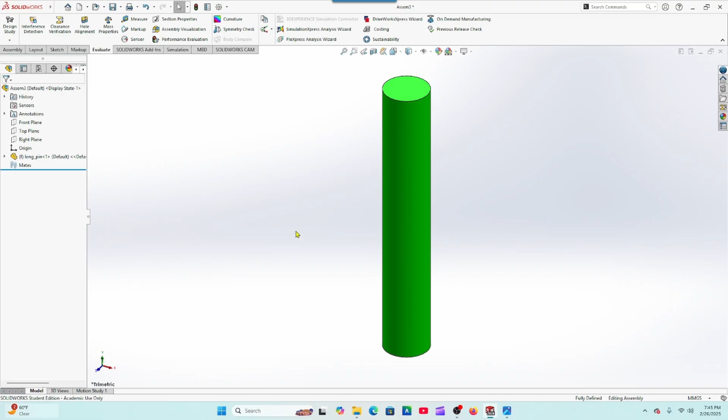So I'm going to bring the first one in and set it up just like so. I'm going to bring that in, then go over to assembly, and we need to insert some more components. So I can hit the drop down and do insert components, and it'll open up my dialog box again, and I can select the chain link. It's going to ask me this again. Now, it probably won't do that on your exam, but if it does, that's what you would select.

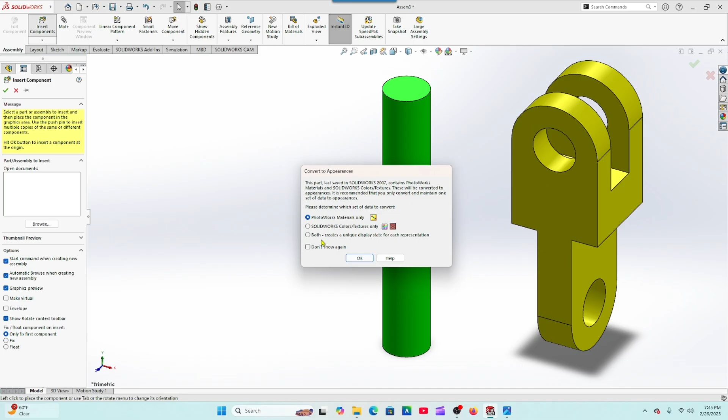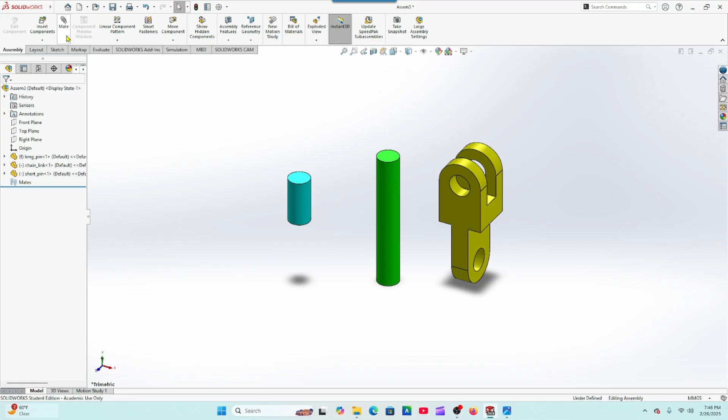Alright, so we've got that, and we have one more component that I'm going to bring in, which is the short pin. I'm going to say yes, and put that right here because that's fine the way it is. Now, you'll see that this chain link is not oriented the way I want it, and in this particular instance it really doesn't matter because this is fixed. Depending on what surfaces I pick over here when I go to assemble this to do mates, it will all come out the way it's supposed to. So I'm going to come over here to where it says mate, we're still in the assembly tab.

I'm going to go to mate. Then I'm going to click the inside of this hole right here, and you'll see it gives me that option. It lets me know I have the face of that part, that chain link. Then I'm going to select the face of this pin, and you see how it rotates it around and orients everything the way we want it as soon as I do that.

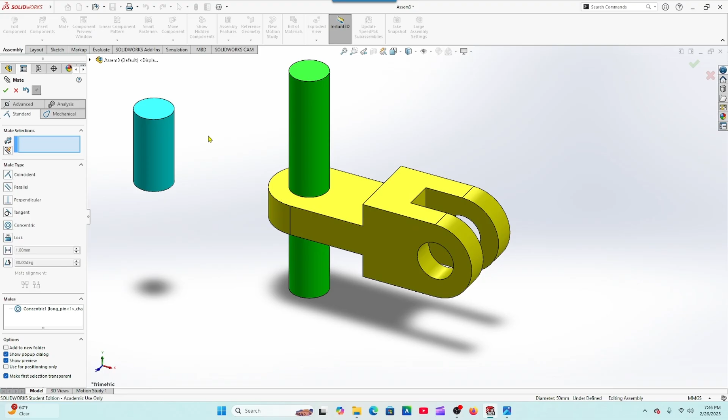So I'm going to hit my green check mark. I'm still in the mate tab, so I don't have to do anything different. Now I can select the top face of this pin or this link and the top face here. It's going to make it coincident, which is what we want, and I can hit my green check mark.

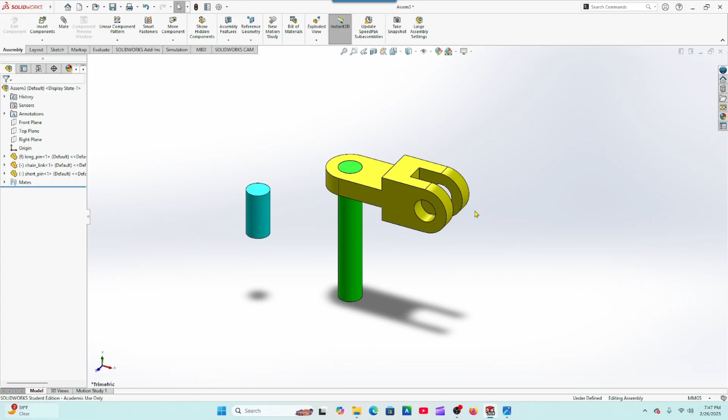Now I'm short parts, right? I still got to bring in some more links, so I'm going to exit out of mates for a second. I could have done this before I started, but I just wanted to demonstrate this to you. If you hold down control, you bring in one part, then hold down control and click on this part and drag away, it creates another part for you. So I'm going to do that a couple more times.

Until I have the links in here that I need. Then I'm going to do the same thing here. I'm going to click this, and it created another one of those, so I'll get rid of that one, I don't need it. And I'll do that right there. Then I'm going to hold control and click, and now I have everything that I need. Now I still need one more of these pins, so I can go ahead and do that while I'm in here.

And we're good to go now. We have all of the parts in here that we need. So now I'm going to go back into my mate dialog here, and I'm going to start putting everything together.

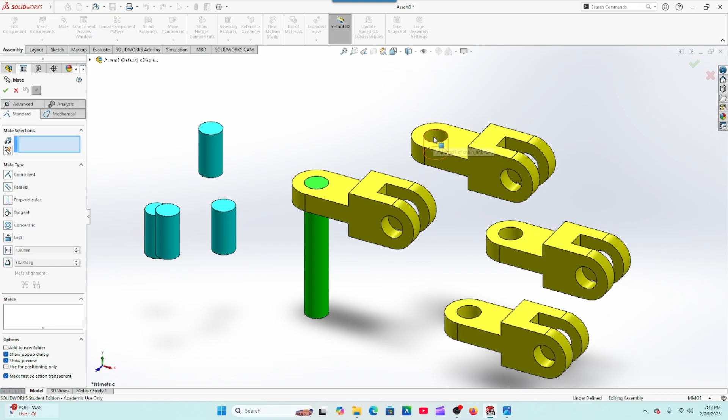So here I'm just going to pick the inside of this hole right here, and then I'm going to pick the face on this chain link, and you'll see that it rotates the other chain link around to fit in there. And then select this face, and this here is just a lot of rotating around.

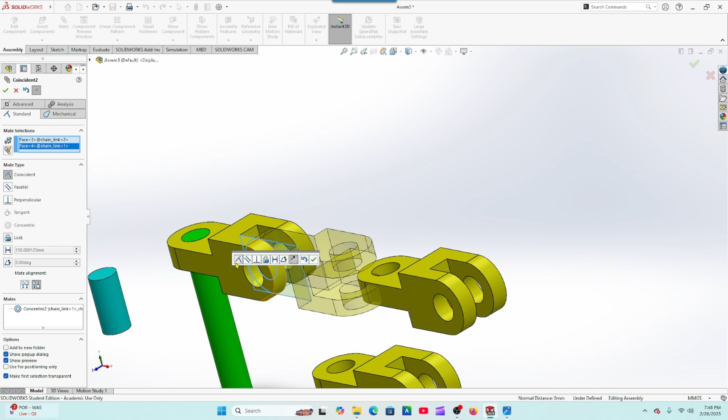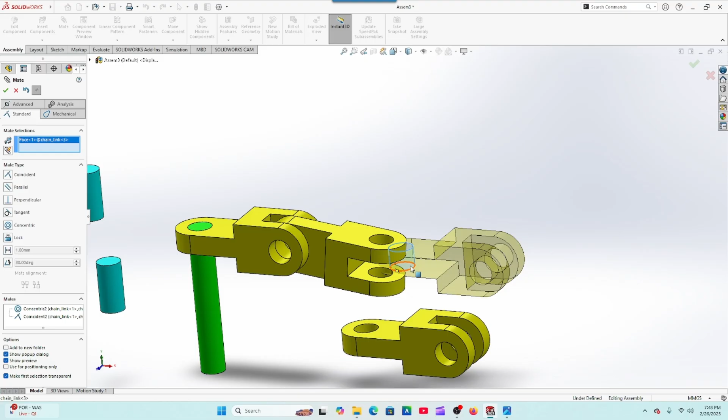Okay, so here I click the inside of that pin, that hole right there, and then I click that hole. It makes that concentric, those two holes concentric to each other. Now you'll see I can move this around and it doesn't affect anything. All it does is it keeps these holes concentric to each other.

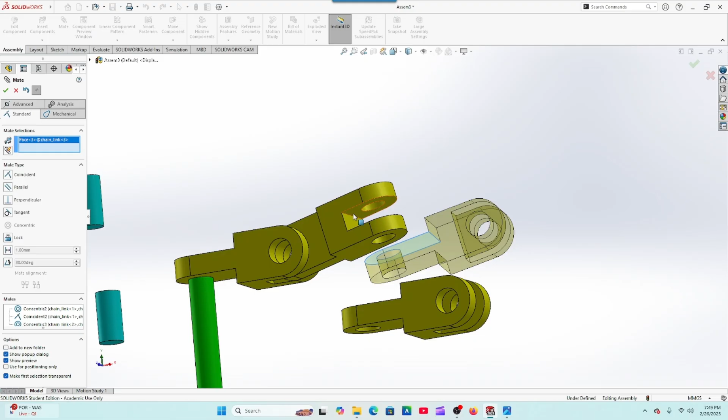But I needed to move it out so that I could select that face and then select this face. And it's coincident, so I can go ahead and hit my green check mark. I'm going to exit out or scroll out just a little bit. I'm going to rotate this around, and I'm going to put just a little bit of a bend in here, because remember, that has a bend to it, right?

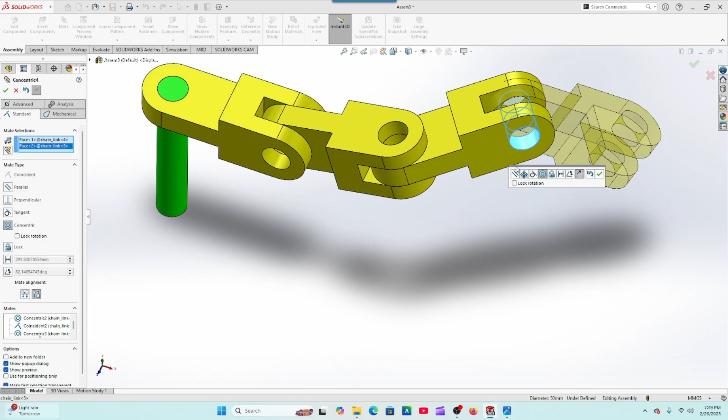Then I'm going to go ahead and scroll back in here. I'm going to pick that surface, the inside of that hole, and this one here, so it makes them concentric. And then I'm going to click this face and this face, make them coincident to each other, hit my green check mark.

And I'm going to rotate this one up, because if I remember correctly, that's the way that was facing. We'll verify it. It sure is. So we're good to go.

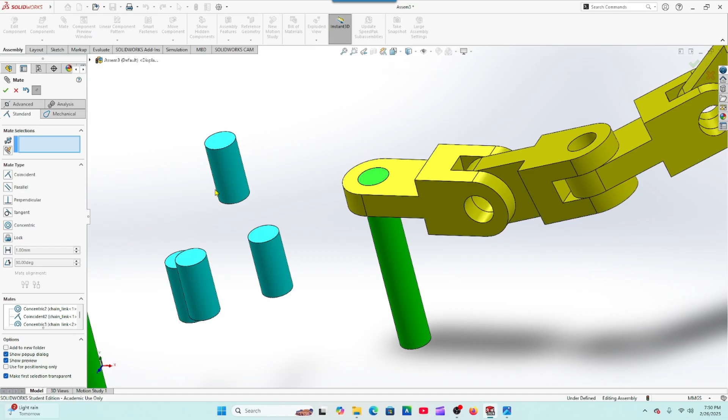All right, so now I'm just going to start putting my pins together. Click that, the face of that pin, and then the face of the inside hole there. It brings it concentric. And then I click the face of that pin and the face of this chain link. It makes it coincident, green check mark. And then I'm just going to rinse and repeat until I get everything done.

Green check mark here. Hit my green check mark. And then I'm going to do this one here.

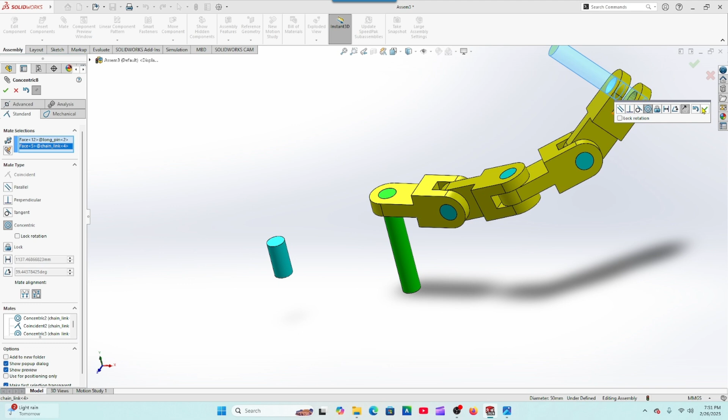Coincident, so everything is in there. And then I'm going to do the same thing to this one. Right, so it is coincident. And then I'm going to select the top, and the top, make sure it's coincident. I think it said coincident on the other one. It should have been concentric.

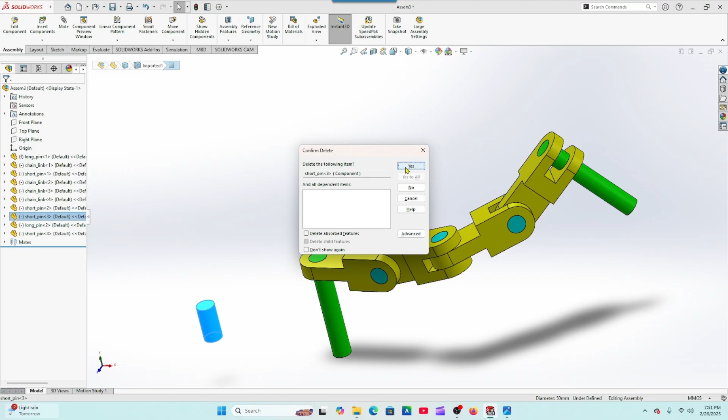And then I'm going to exit out of here for just a second, because this is annoying me, and I'm going to get rid of this because we don't need it. And then I'm going to go back into mates.

So now what we're going to do is we're going to add some angle mates to these links to get everything set up properly. So I'm going to click the face of this link right here and the face of that link right there. And then in this dialog box, I'm going to select angle. And then it gives me an angle right here of what it needs to be.

And then for this one, I'm going to do 180 plus 25. And that sets that where I need it at 25.

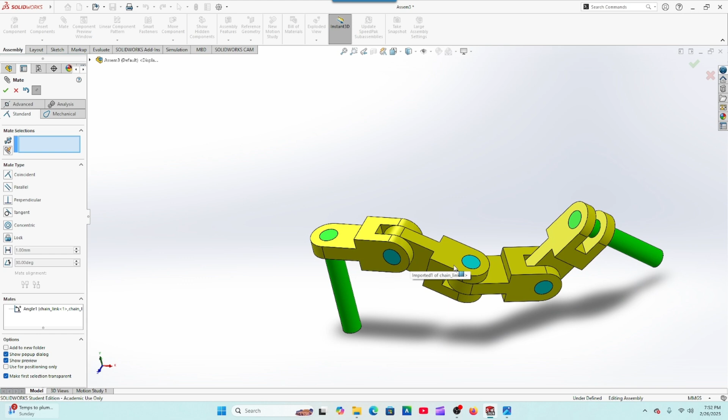And then I'm going to set this one at an angle, and I want this one to be 125. So that one's good. And then the last one that I have to do is this one and this one.

That's going to be at an angle, and this one's going to be at 130. And then I hit my green check mark. All right, so we can exit out of here.

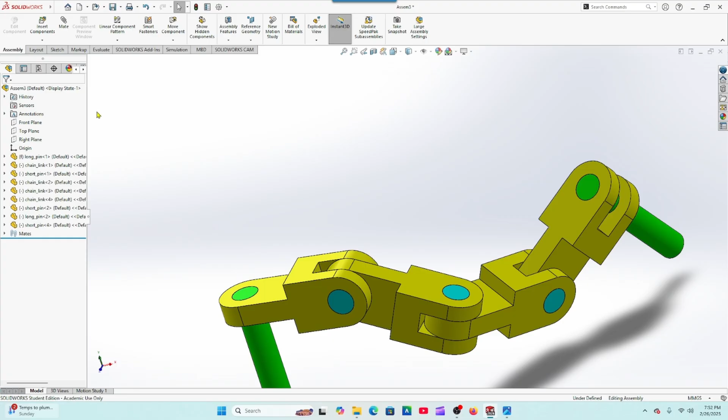Now the last thing that we have to do is we have to put in some reference geometry. So what I'm going to do here is I'm going to click the drop down and I'm going to select point. And then what I'm going to do is I'm going to make sure that I have arc center selected.

And then when I click on this arc, it's going to give me the center of the arc, and I just click right there and it puts a point right there. And that helps me in putting my coordinate system, which is going to be next. It puts it right in there.

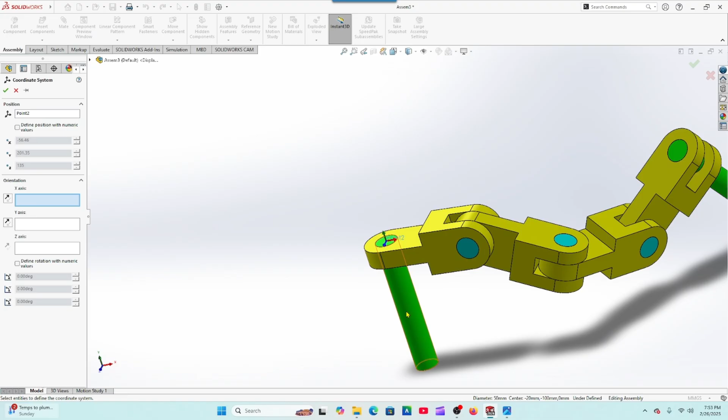So what we're going to do here is we're going to add a few mates, and right now I'm on X. So if I select this line, that runs parallel to the direction of X here, that's going to lock that in, but you see how it rotated it around? So if I hit that little double arrow button right there, you see how it flips it back into the orientation that we want it, right? So that's good, now we're set there.

Now we're going to do the y-axis. Well, the y-axis is running the length right here. So we need to have a surface or a line that's going to align with that, which is going to be this one right here. And you see it did the same thing when we did this. So we're going to flip that around to where it looks right. And I think that looks right.

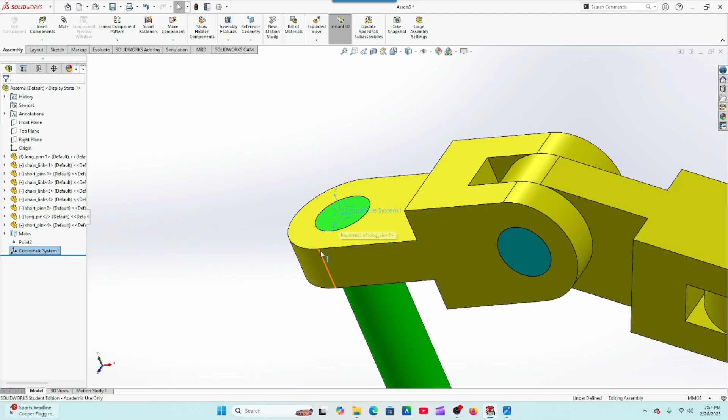And then we'll do Z right there, and you see it flipped it around on us. So we need to turn that one around. And now we have that same look that we wanted before. I'm going to hit my green check mark. See, we have our Y going up, we have an X going this way, and we have Z this way, which is the same as our picture right here.

Now, if all of our angles are correct, 25, 125, and 130, we will be good to go. We should get an exact match to one of these four answers right here when we go back in there. So I'm going to go back into the drawing here, and I'm going to go to evaluate, and I'm going to go to mass properties.

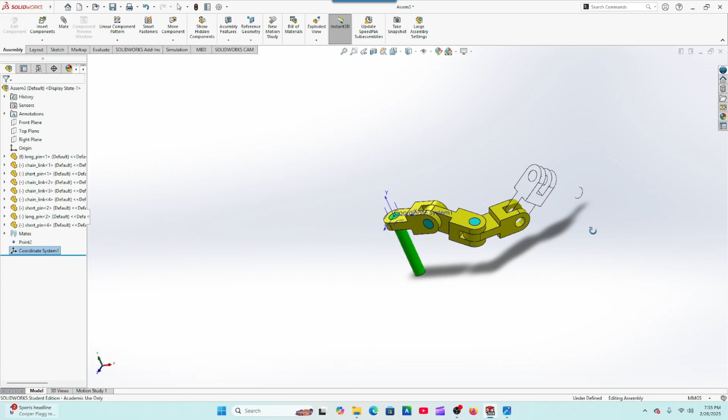But wait, these numbers don't match, and there's a reason why. Right here where it says report coordinate values relative to, it's set to default right now. So if we hit that drop down, you see it says coordinate system 1. Well, that is the coordinate system that we put in there. So once I click that, then you see that these values right here changed, right?

So we have 348.66, we have negative 88.48, and we have negative 91.40. So let's look and see which one of those four answers that we have on that sheet match up to that. I'm going to guarantee you that it matches up to A.

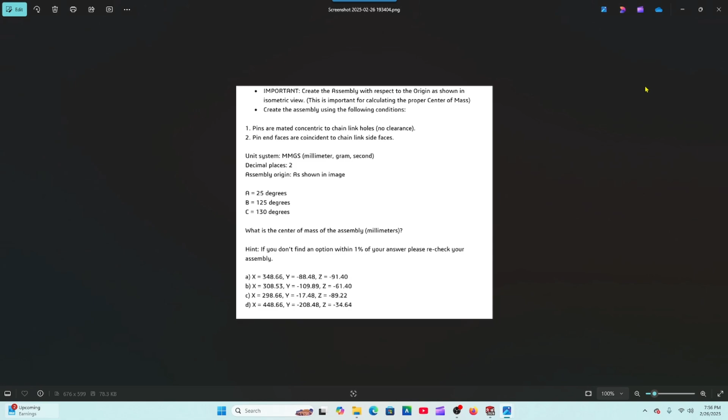I'm going to minimize this so we can look at it here, and I'll drag that off to the side.

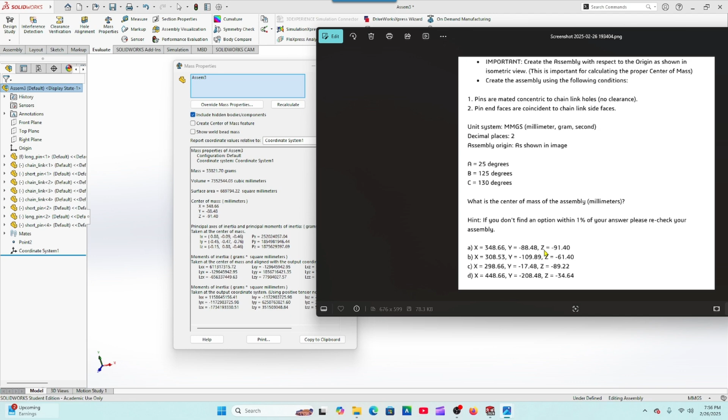348.66 - well, there's only one 348.66, so we're good there, and that's for the X. For the Y, it's negative 88.48. And for the Z, it is negative 91.40, and we have Z negative 91.40. So we have a match there.

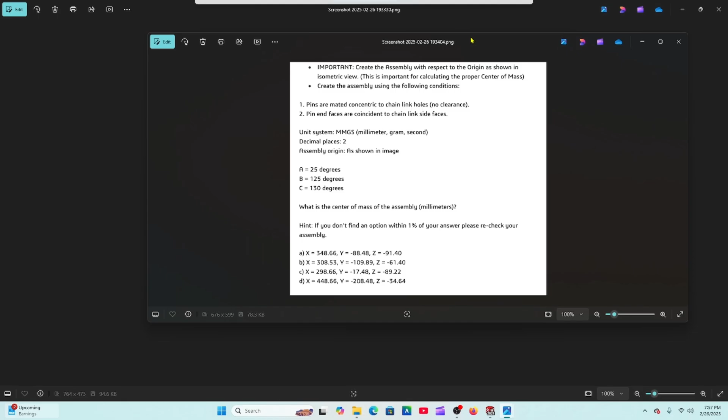Now, in the SolidWorks exam, you're going to get something just like this, and it's going to give you a multiple choice for that first assembly. But on the next assembly, it'll probably have you make a change to the assembly you're working on. Then it'll say, okay, modify the assembly in this way, and write down what is the center of mass of the assembly. It'll give you a dialog box to put in your answer, and that's how you would do that.

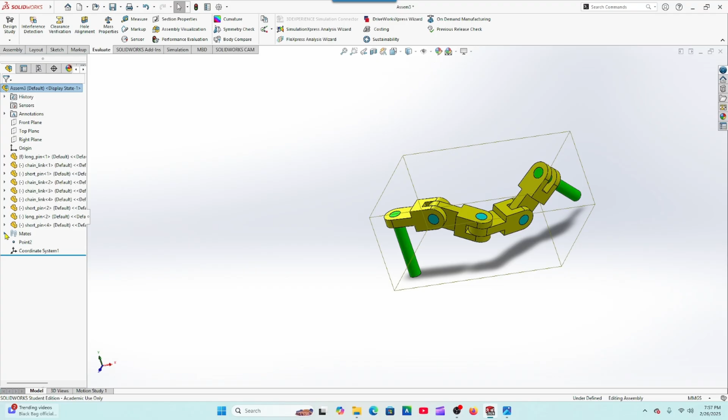All right, so we're going to go into mates - this is how we're going to fix this. Now, normally what I would do, and we'll do this here too, is save this. I'm going to save all, and then label this so I know what it is - I'd say maybe first assembly.

Q1, and hit enter. Then I'm going to go back up here and do save as, and just change this one right here to 2 because it's question 2. And then we're going to go in here and make our changes.

So we have 3 angles right here. I'm going to go in and change this first one. So here we say 180 plus 30, which gives us 210. All right, so we'll hit our green check mark.

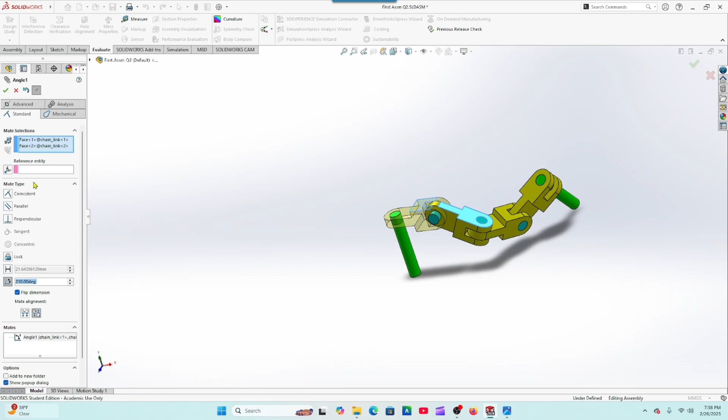And we'll exit out. And then our next one was going to be 115. So we'll come back over here - for our third one, we're going to edit that feature and say 115. Just like so, green check mark, and then we can green check mark that again.

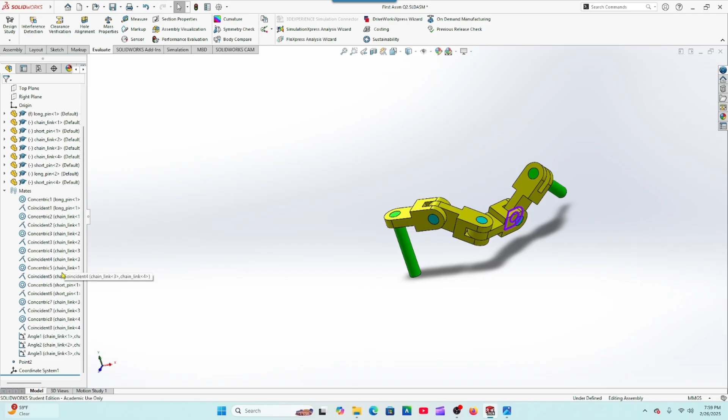Our last one, just so we're sure we're on the right one, is going to be 135. So we'll come back in here, edit that one, and say 135 - we'll just change that number. 135. Already out of there. All right.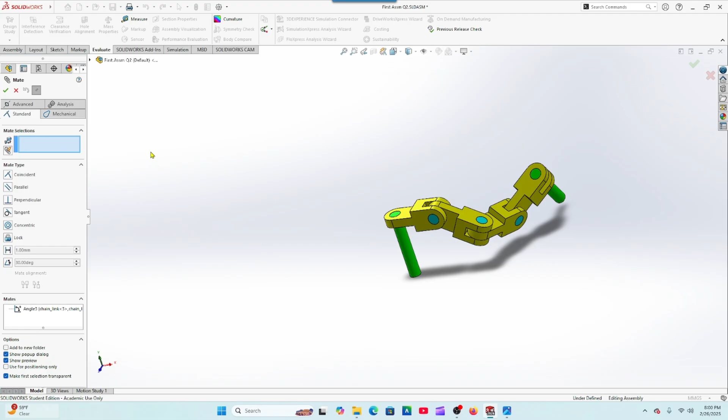So let's just verify that that one took - I want to make sure that we're good. 135. Okay, so we'll go ahead and exit out.

And then all we're going to do is go back into evaluate. We're going to look at our mass properties, recalculate, and then these are the values that we have now. So this is what you would put in there. It's been a while since I took the test, but I think when it had you input your answers, it had one for X, one for Y, and one for Z. But if it doesn't, just follow the directions they give you on how to input that information, and you will be good to go.

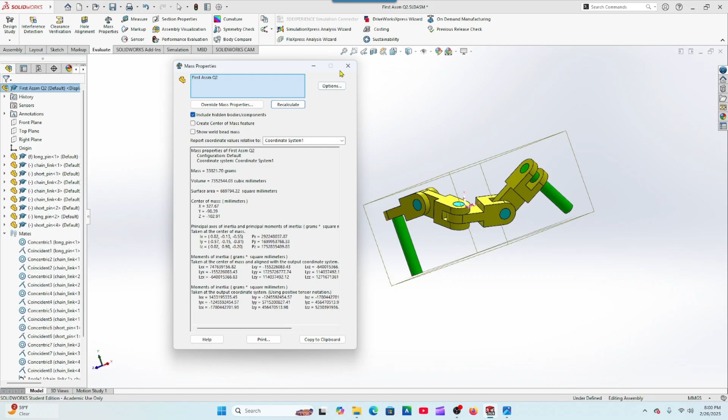All right, so I'm going to go ahead and save this one, and we are done.